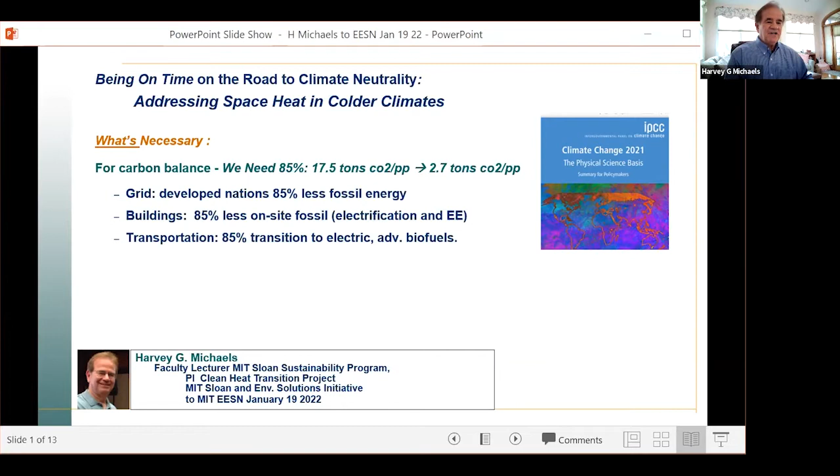When people complain about the third world not doing as much, they're starting just around 2.7 tons, so it isn't that they don't have as far to go. But 85%, you can do that in a lot of different ways—there are formulas to get there. One of the things is you don't have to do it at the same level between grid, buildings, and transportation, but it's a good place to start: what can you do to get 85% in all three? The trick is, when is it necessary?

I don't know how many of you saw the movie Don't Look Up. Fortunately, as a society, we are beginning to look up. I've actually used the analogy of an asteroid speeding to Earth that was going to hit the US as a teaching vehicle for about 10 years, and perhaps they heard that. But this movie basically puts an analog to climate change, so I think we are looking up. The question is, can we bring the elements together to actually solve the problem?

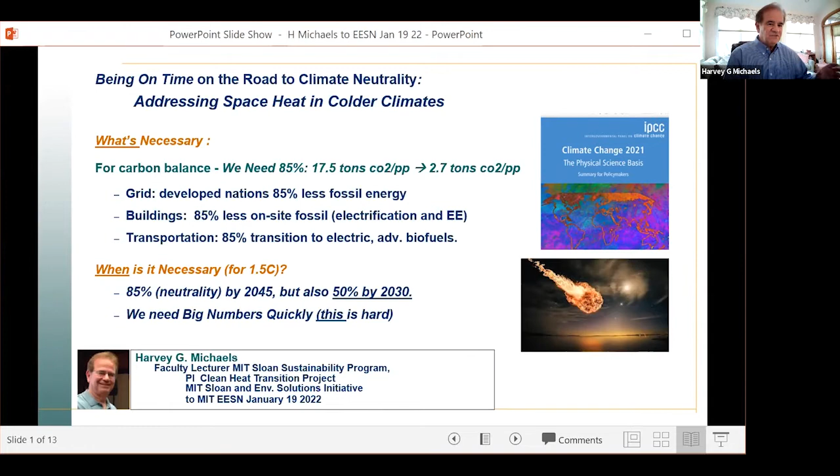To do it, we have to get to 85% by about 2045, but 50% by 2030. It's a cumulative problem, so one of the real challenges is that it's not a central solution only—it requires big numbers quickly. It's nice teaching at the Sloan School now, because I have all these great minds and thinkers about how to address markets and see if we can get the rapid change we need.

We also, in Massachusetts, have great policy support from the state, which was an early adopter of energy efficiency and climate policy, and sued the EPA to have carbon considered a pollutant under the Clean Air Act of 1970 successfully. That made a lot of the things we're doing possible. In March of '21, we passed a great roadmap law that requires us to get to 50% by 2030, our fair share, with 5-year targets by sector coming out this July.

There are also a number of other things we can come back to in Q&A, including the held-off Transportation Climate Initiative, utility regulatory rework, and end-of-gas planning, which is very relevant to what we're talking about today.

At MIT, some of you may have seen En-ROADS and be aware of the MIT Climate Pathways project. This applies system dynamics to look at the problem of climate, and it's great that there and other places around MIT we're rolling up our sleeves to see if we can find the solution space to actually meet the needs in time.

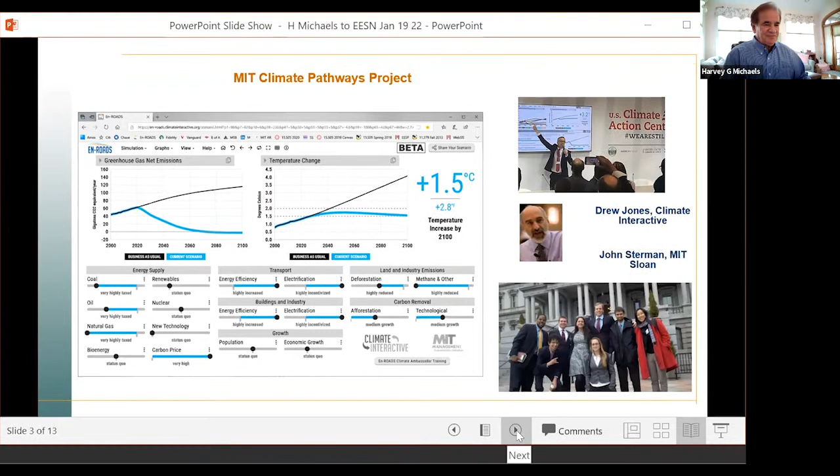So I'm going to teach for a minute and make sure we know a little bit about heat pumps. I'll have to take my teacher hat off in just a couple minutes, so it will be a little bit of a fire hose, but I want to make sure we all can talk about this directly.

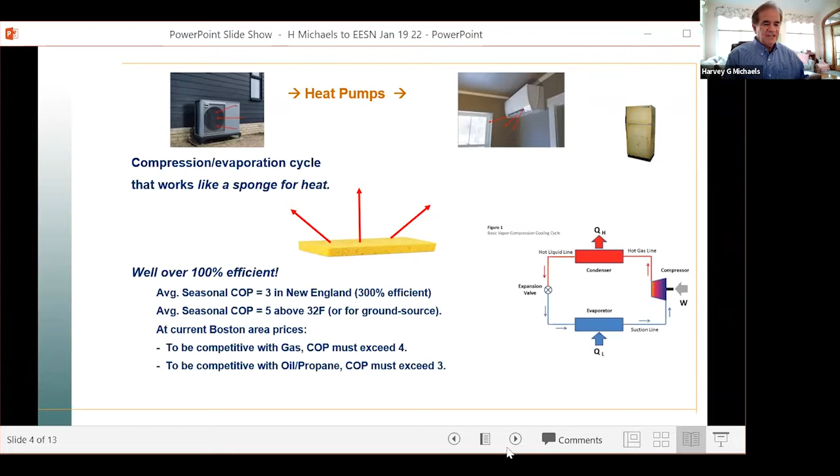A ground source heat pump could have a coefficient of performance of 5. At Boston prices, you really need to be over 4 in order to be cheaper all year round with a heat pump compared with using gas, and over 3 against oil and propane, which is about where we are. So that's kind of a wash, but gas is a challenge.

So this is what we're starting with. Our study is looking at a transition to how we get lots of heat pumps, which is what we need for climate, in a short amount of time. The plan the state put together called for 1 million heat pumps in new homes out of the 2.5 million in the state—40%, putting in a heat pump over the next 10 years.

This seems like a difficult task ahead. It gets front page of the Globe sometimes about how difficult it is. But the bottom line on the work is that it looks possible to do it, in a way that everybody's happy about and nobody's sacrificing, and the grid can handle it.

This is what's really great about system dynamics, is that we can bring these elements together and look at them together. I think my colleague Rob Nachtrieb is in the audience today, who was a partner doing system dynamics modeling in support of this project, and I appreciate that. I'm not sure if our MIT graduate Judy Chang, who's the Undersecretary for Climate for the state and has been an important partner in helping us think about these things, is on the line.

So this study is essentially examining how we get to 1 million. I'm not out buying one heat pump and considering how it works—I'm out buying 1 million of them, and how will it work in a system dynamics setting between now and 2030 in a state like Massachusetts?

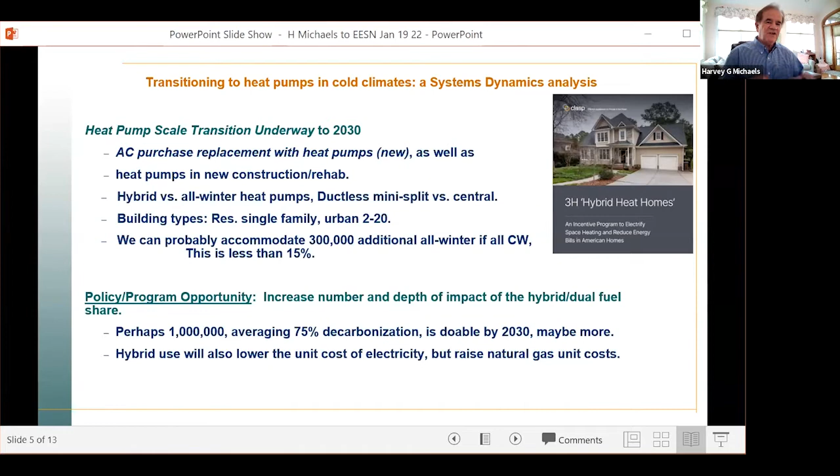Otherwise, we run out of grid space at about 300,000 all-winter cold weather heat pumps, which is way short of the 1 million we need. So it's this hybrid heat strategy that allows us to get to a solution.

If I had a whiteboard—I've started building these things because we've done a lot of online classes over the last 2 years—I start drawing a chart of the temperature on the outside from 0 to 100, and the percentage of the natural gas cost per hour from 0 to 100, and drew a few lines. What happens is it's a linear relationship between gas cost and outside temperature as it drops.

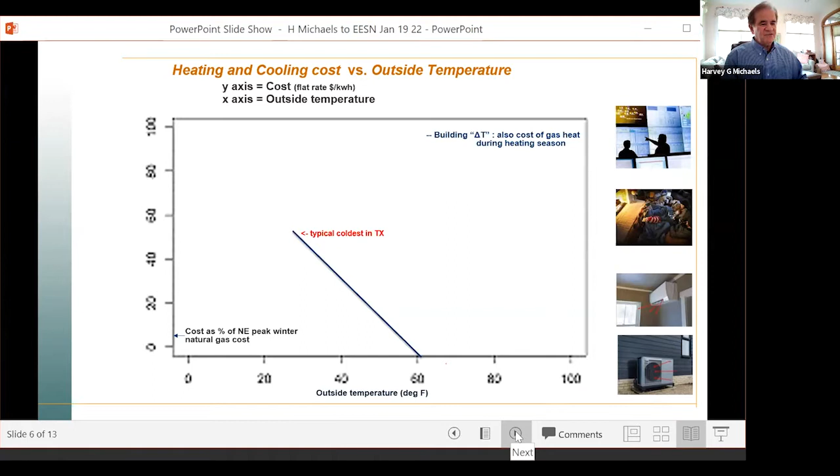In Texas, that's as cold as it gets, except last winter. And this is how cold it typically gets here. If you have heat pumps, you can get to this typical outside Texas point, mostly cheaper, and in the summer you get your air conditioning. So that's very common in Texas.

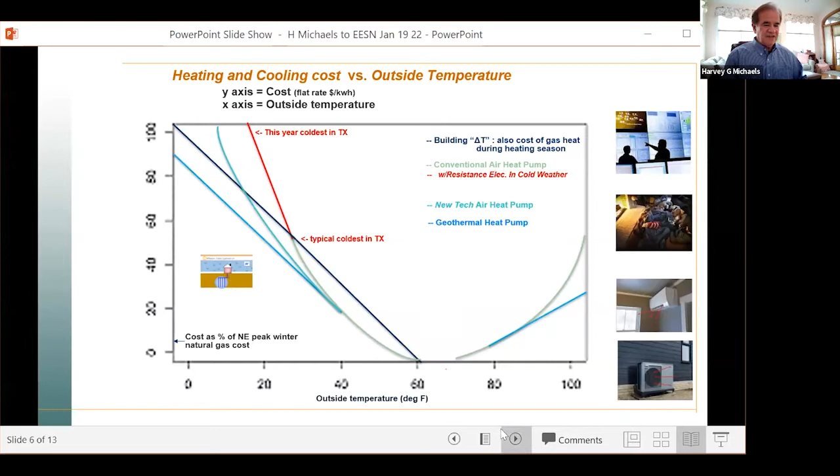When you get a really cold year like last year, you're in trouble. Cold weather heat pumps do much better, but they have a place where they become a little bit more expensive than the gas system—that tail. Ground source heat pumps do great—they're cheaper than gas all year round, and they bring down air conditioning costs as well.

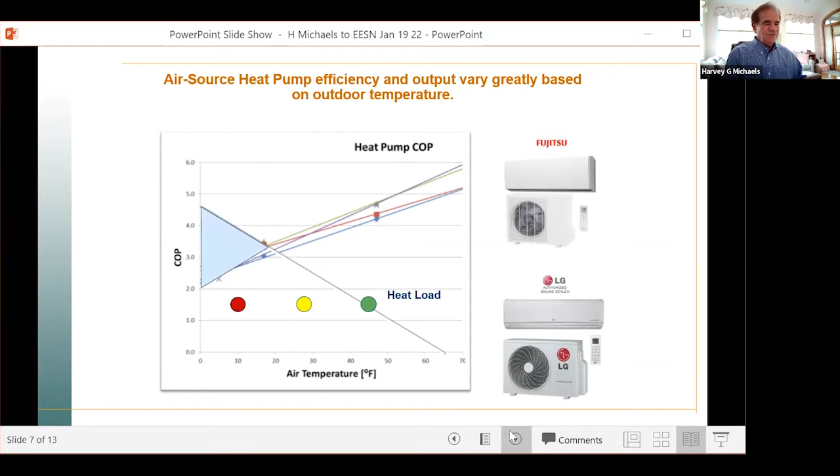We call this the green zone up here, where it's really easy, above 35 degrees. The yellow zone is between 15 and 35 degrees. And the red zone down here is below 15 degrees, which has happened twice in the last week in Massachusetts, so it happens.

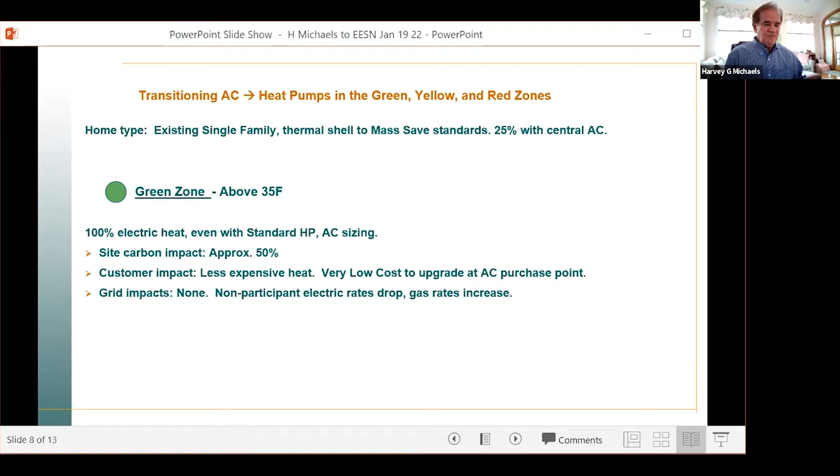We're learning that the green zone is a place where everybody wins, and the heat pump industry is learning to sell you heat pumps instead of air conditioning. It hardly costs any more. That's a place where we can clearly get a million, because people are buying ductless mini splits like crazy for air conditioning, and they always come as heat pumps as well.

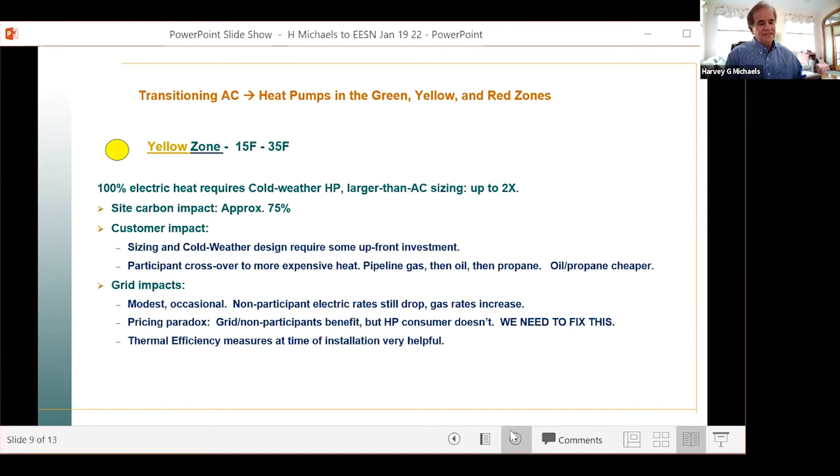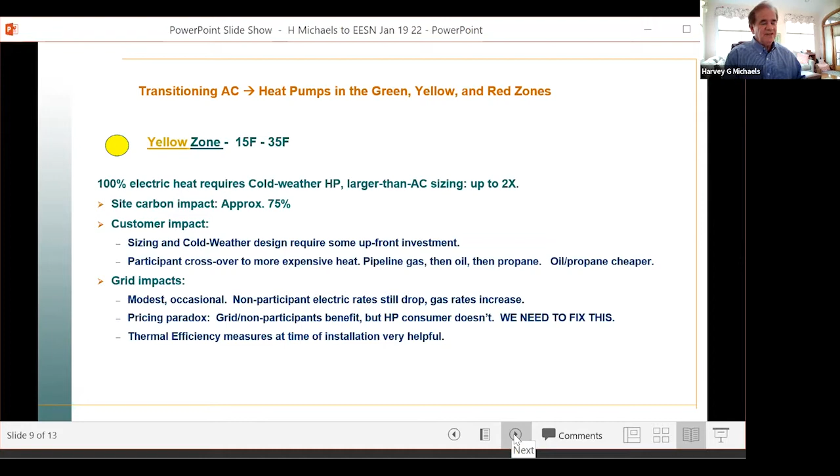We have the yellow zone, which is more challenging. It's a place where we need policy to support it, so the problem of gas costing more in that zone can be addressed with rates. Then there's a red zone where it's difficult. If we have an extremely efficient home, or do something new and different, we can find a way to have heat pumps work all winter long.

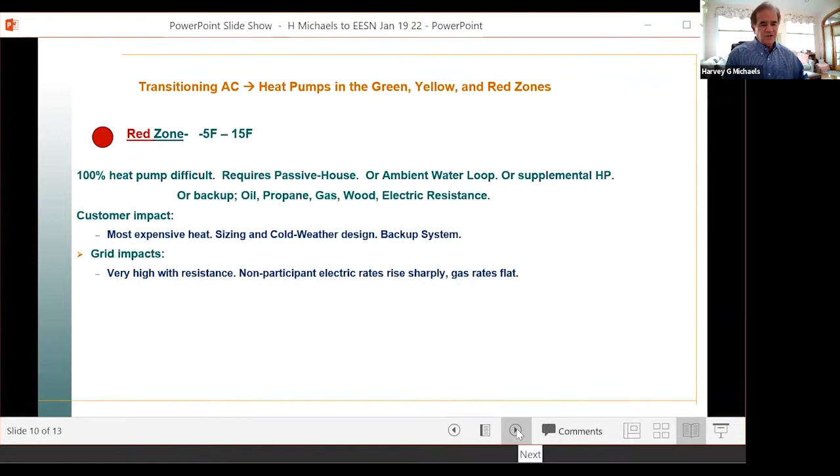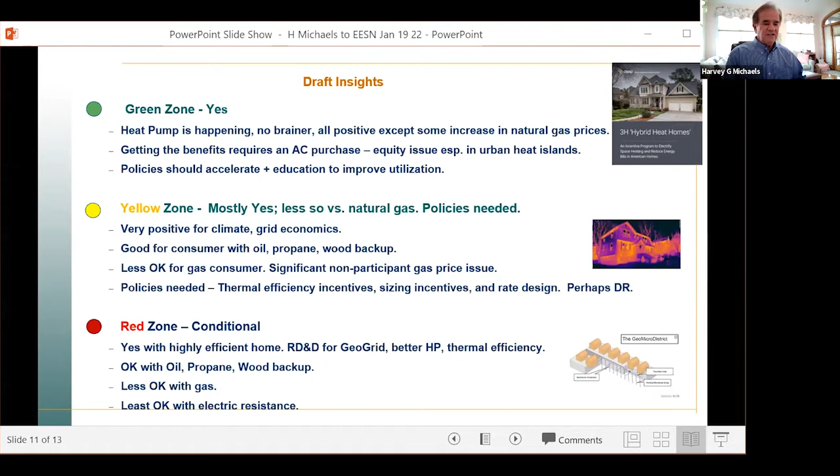So we're building a set of insights: the green zone, people want air conditioning, it's a big driver. The yellow zone, we need to get our policy right. Red zone, we need some R&D to get that last mile. I'm thinking of the red zone like on a football field, not like stop—it's the last 20 yards, we got to get across the line.

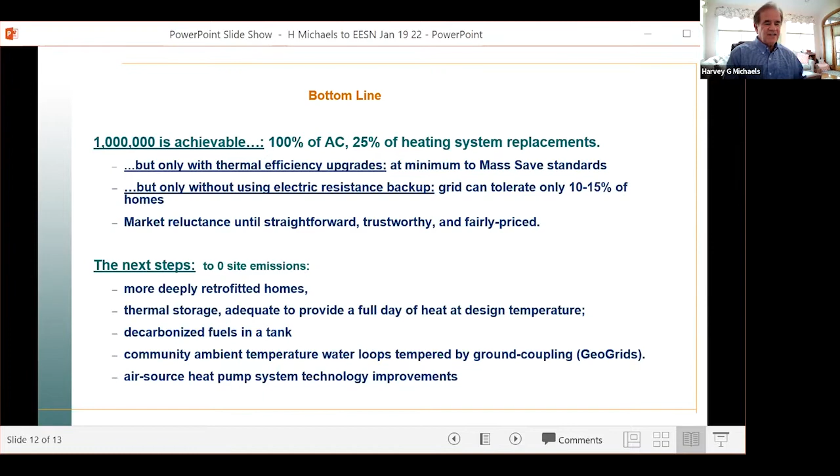So the bottom line of our work so far is that a million is achievable. There will be a rush where people run towards getting ductless mini split heat pumps for their home, for air conditioning, and get heat as well. We can probably get about 25% of heating system replacements. It helps if we get thermal efficiency upgrades. We need to avoid electric resistance backup, and then move on to technology improvements. Meanwhile, we need the markets to be able to adopt so people understand. That's how we'll get to the solution.

So here's the bottom line. I learned this from Anthony Leiserowitz, so I credit him, but other people have described the truth about climate change in 10 words: it's real, it's us, it's bad, scientists agree. We've had things like En-ROADS to explain this, Greta Thunberg bringing everyone out to understand it. The thing I think we can add at MIT with the work we're doing is there's hope. My hope is largely the people MIT is training and putting out the door who are now picking up the baton and getting this work done. That's my message. Thank you.

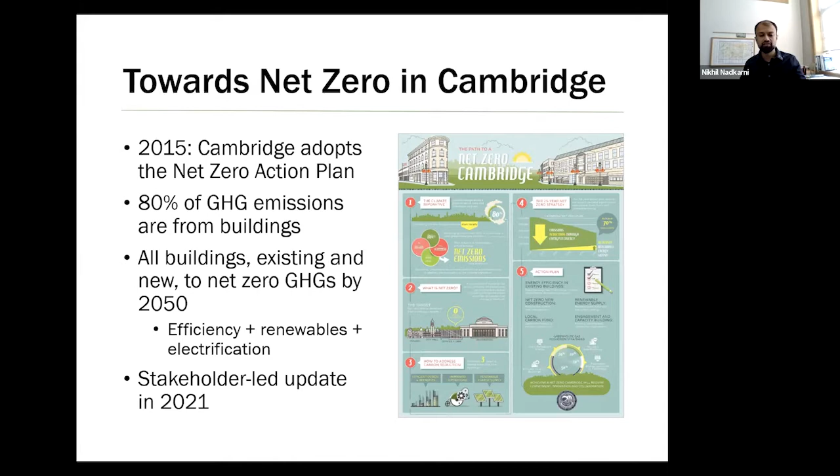Over the past year, we've been updating it through a stakeholder-led process. One of the key actions was identifying sources of low carbon energy and conducting a low carbon energy supply strategy. We wrapped up this project in 2018 and identified that about 60% of the energy used in Cambridge is for heating, cooling, and hot water—the thermal energy demand of these buildings. Similarly, it's about 57% of our greenhouse gas emissions.

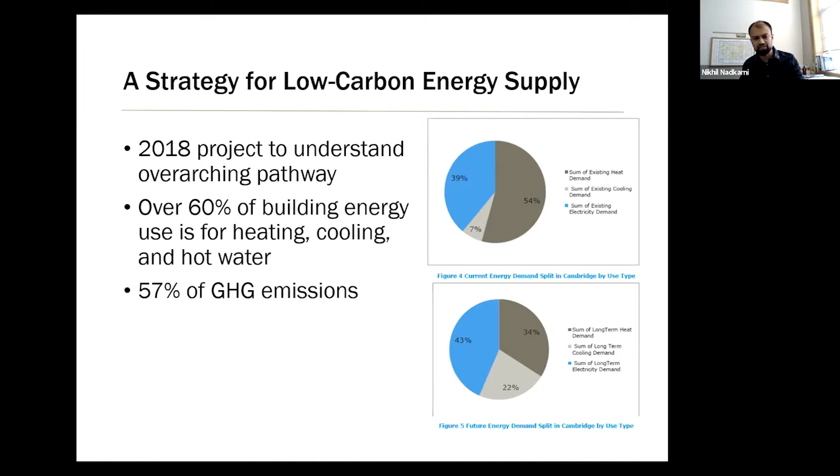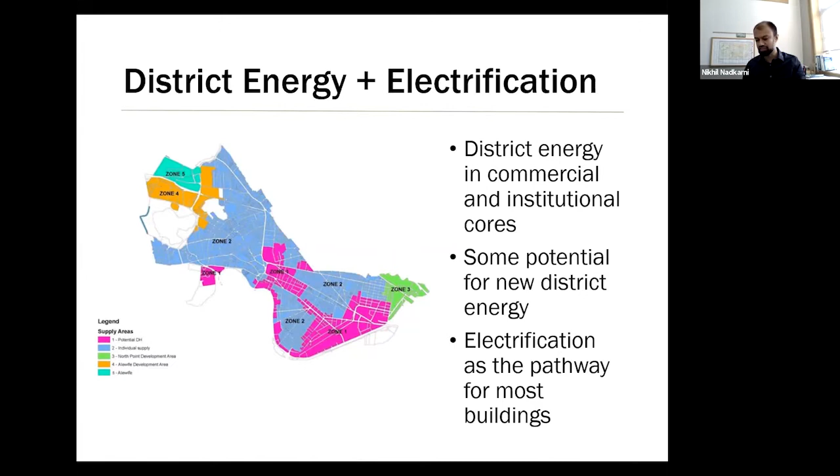This led us to the Cambridge Renewable Thermal Study, in which we examined the pathways to electrification for all building types. Cambridge has a really wide variety of building types that we need to think about for renewable thermal. About half of the square footage we examined, that's just the electrification component, not the district energy buildings, is commercial buildings, and the other half in our residential mix is a pretty wide variety of buildings.

Only 7% of the homes in Cambridge are single family. Another 27% are in that 2 to 3 family space, and 2/3 of Cambridge households are in what we would consider a mid or large size multifamily building.

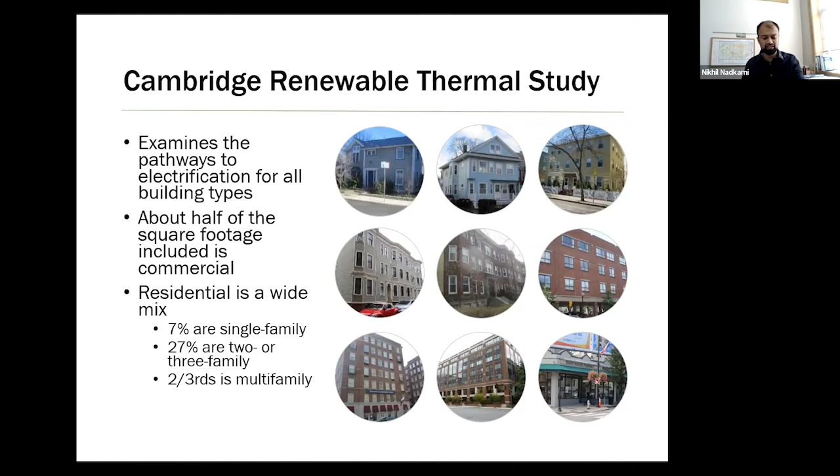As we looked at different technologies for these different types of buildings, we identified a feasible path to electrification for each building type. From the largest office buildings down to the smallest buildings, there is a feasible pathway to electrification. This includes ducted or ductless mini splits for small residential and commercial buildings, and VRF, that's a variable refrigerant flow system, or an air to water system for our larger buildings.

But we do observe that for some of the larger buildings, it is a more intensive, more extensive project that will often need to be timed with deeper renovation. It kind of fits into that longer capital investment cycle that you might see in a larger building.

We've seen the potential for higher costs, as Harvey identified, and potential demand charges, especially in that multifamily space, that will affect so many Cambridge buildings. These are buildings that will be moving from gas to electricity for a primary heating load, and they would be needing an amount of electric capacity that is really not at all present in the current rate structure for multifamily buildings.

We've seen that efficiency and solar can play a key role in cost control as well. Efficiency in lowering the demand needed in the sizing of the equipment, and seeing that solar and heat pumps is really the cheapest way of providing heat to a building in Massachusetts. We've also looked at resiliency opportunities and challenges.

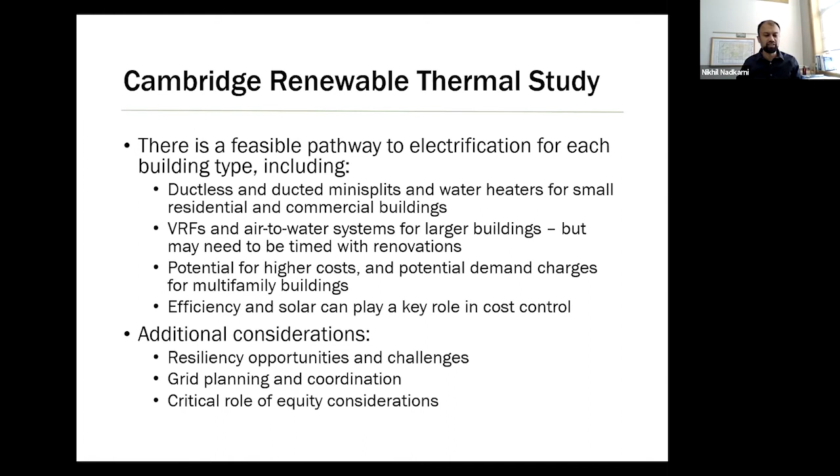There are other places that are also thinking about the same sort of energy transformation. Through my sabbatical work, I was able to understand some of the work that's happening in Germany. While there are a lot of different pieces in a different context that are happening, hopefully we can start to identify some pieces that are relevant to the Cambridge context.

The German energy transformation, or the Energiewende, is maybe a term you've heard. It's really an economy-wide transition in how we use energy. While it was coined as a term in the 1980s, it really became a federal commitment in 2010. There are three pillars of the Energiewende. One is efficiency first, reducing the amount of energy we use. The second is supplying that energy from renewable sources, and perhaps that's been the most visible success of Energiewende, with a 46% renewable share in 2020 and growing since then. And the third, really the most exciting to me in some ways,

is sector coupling: the provision of renewable electricity to where and when it's needed. Not just to the end uses where it's needed, but also at the time that it's needed. This is where you can get into things like shifting the load and tapping into the role of storage.

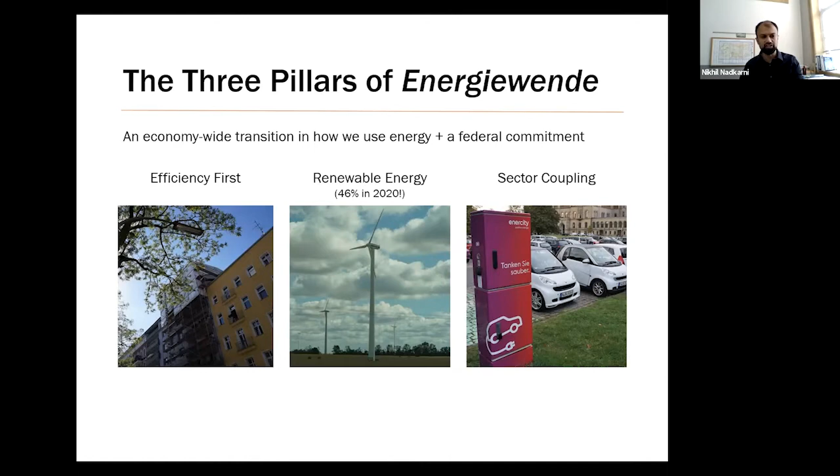In this example, this is a community utility in Hanover, and they are procuring wind energy to supply their EV charging stations. Tanken Sie sauber means fill up clean, so you have this direct connection of wind energy into the EV charging network.

But the challenges are very similar. So there are very deep incentives. You can get a €120,000 loan for energy renovations to your home. Yet only 1% of buildings are renovated each year, and only about a third of those, so 1/3 of 1%, are renovated to a level that is sufficient for decarbonization and for 2050 readiness.

And so in contrast to that 46% of renewable electricity, only about 13% of heating is renewable. And so there's a need to renovate millions of buildings each year.

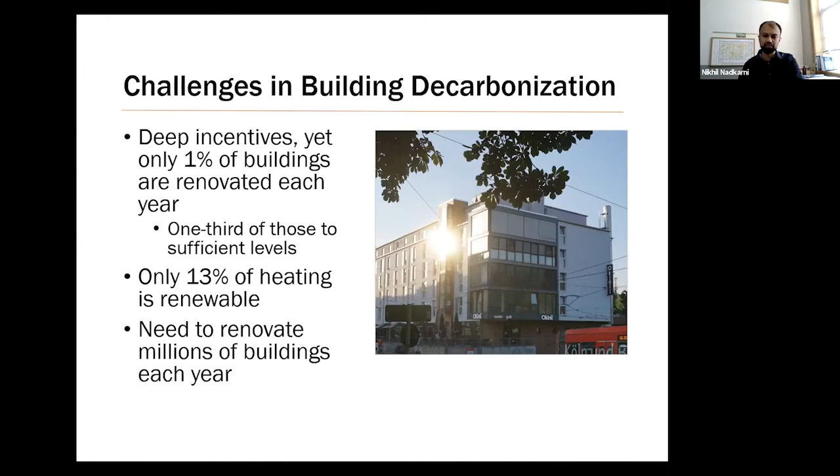So this is where we enter the Wärmewende, which is the heating decarbonization transformation. It is a national strategy with local implementation, and we see a lot of cities and community utilities taking the lead in implementing this work.

One of the early successes is that heat pumps are already the most common form of heating in new construction in Germany, more common than gas furnaces, more common than wood pellet or oil or anything like that.

And we're also starting to see a push towards community level heat planning. This is effectively a law in the Netherlands, and these same sort of principles are being rolled out in Germany in a way where the local context, local sources of waste heat, local building types are all being brought into a community level heat planning process.

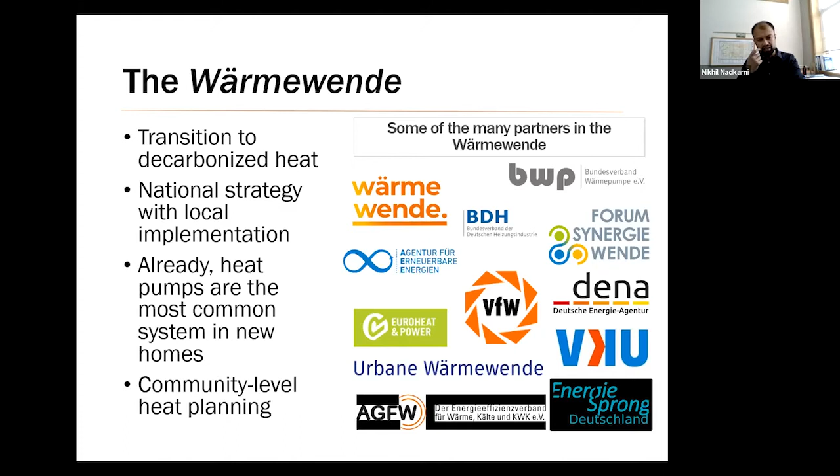And it's also a multi-sectoral transformation, where we're looking at partners in the nonprofit space, technology, and industry being brought together in a heat transformation dialogue.

Some of the near-term initiatives: there are new financing tools at the federal level, new deep incentives for electrification, such as a 40% rebate for oil conversion and a couple of other cases, and a real emphasis on advising — moving from the sort of do-it-yourself approach to really supporting people in identifying opportunities and conducting as deep a retrofit as possible.

So there are a lot of ideas in this space that are being tested and rolled out. We definitely don't have time to get into all of them, but I can focus on a couple of key themes that I think we can draw upon and dig into in the next section.

Building performance standards — basically a requirement for existing buildings to start achieving decarbonization targets — are being discussed in the German context. And last month, the EU rolled out a draft directive that would implement building performance standards at a continent level.

New financing mechanisms, because financing this transition and reaping the long-term savings is going to be a really important part of implementation. The digitalization of the heat supply, so thinking about grid interactivity and the appropriate signals for when and how heat is used, and the delivery of decarbonization through new entities focused on that at the local level.

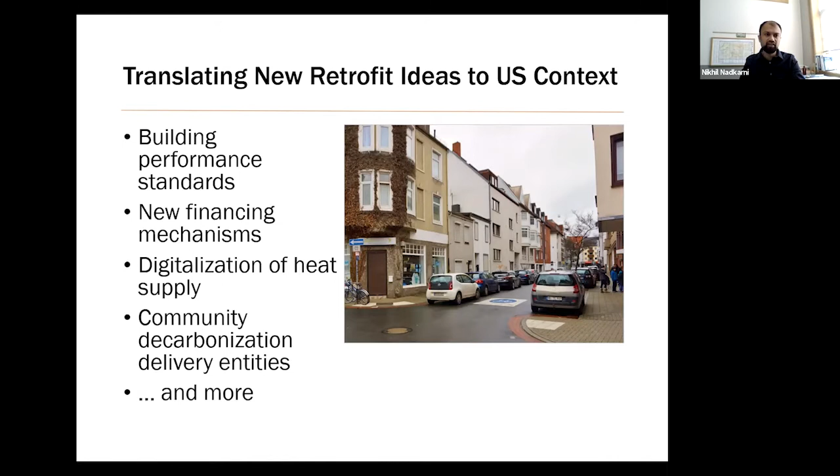So which of those pieces can we draw upon, and what are we working on now? I'll touch on a couple of things that we're working on in Cambridge, and I'm happy to dig into them more during the Q&A.

So right now we're working on a retrofit advising program, providing advising on project development, working with pre-vetted heat pump installers, helping people review quotes, and we are seeing a tremendous amount of interest in heat pumps and heat pump water heaters through this program.

Similarly, we're providing advising to the multifamily retrofit space, and have been for a couple of years, doing more comprehensive retrofit planning for buildings from 5 to 50 units.

We are also working on building performance standards in Cambridge, and this would really be the single most impactful action in our net zero action plan update. By focusing on the largest buildings in Cambridge, we're focusing on about 1,100 buildings, and we'd be addressing about 70% of greenhouse gas emissions in the city.

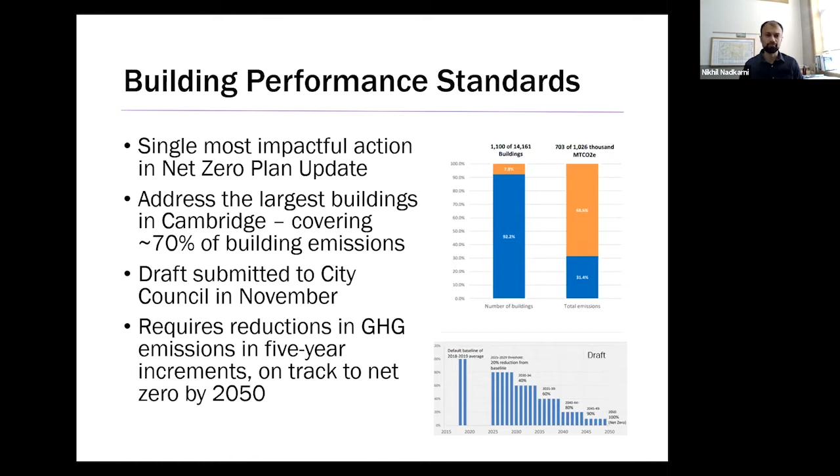A draft was submitted to City Council in November, and the requirements would place buildings on a trajectory to full decarbonization by 2050 in 5-year increments. Again, the impact of focusing on these buildings and institutions would really drive the most decarbonization impact in Cambridge's work.

For buildings below that threshold, we're looking at transaction points and investigating the role that natural turnover points in a building's life cycle, such as sales and renovations, can play in decarbonization, and how we can identify opportunities there for a deep retrofit and couple that with project support.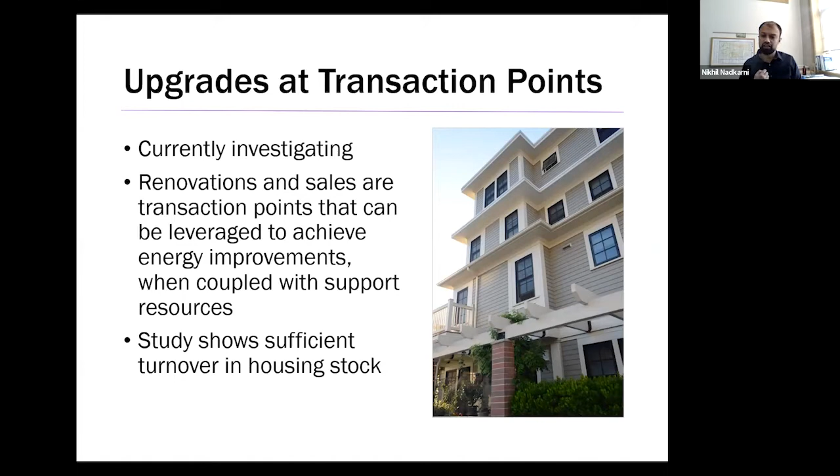We're also working on a community microgrid concept in the Port neighborhood of Cambridge to serve the roles of decarbonization and resiliency through the deployment of individual systems for solar and storage. This really fits into that electrification piece as well, because we are combining solar, storage, and electrification, and aggregating those assets to create a revenue stream in a community-owned entity.

And as we think about things like the phase out of the gas system and the drawdown of the gas system into a potential stranded asset, how do we avoid burdening the most vulnerable households with those impacts? And finally, what role can cities and community entities play in an equitable scale delivery of decarbonization, whether that's through an aggregation model or a community delivery mechanism? This is something we're seeing in other US cities and following very closely as you think about how to achieve decarbonization at scale for buildings and residents in Cambridge.